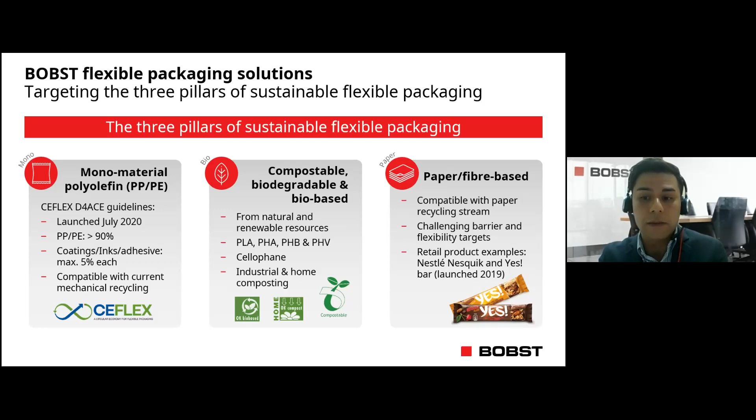This brings me nicely to a point on what are the mega trends for barrier targets. There are many depending on the different food segments, but we find for high barrier application, there are two targets. The first high barrier target is metallized polyester replacement at less than 1 cc per meter squared per day for oxygen, less than 1 gram per meter squared per day for water. The second is ultra high barrier target, also considered as aluminum foil replacement, which operates at 0.1 cc per meter squared per day and 0.1 gram per meter squared per day.

Let's take a look at the solutions BOBST and their partners in collaboration have got on with regards to these two mega trends.

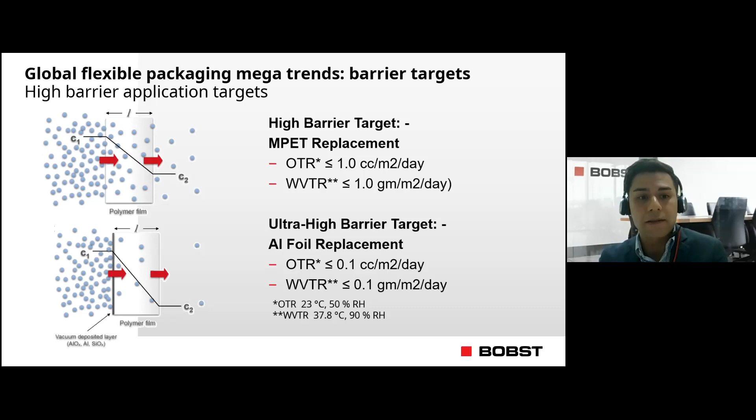Here we are presented with the dilemma visually of the mixed material structure, PET to PE laminate on the left, and on the right, the intermediate step of developing monomaterial PE. On the left, PET is coated with aluminium oxide, or ALOX, a brittle ceramic transparent layer, processed on a vacuum metallizer. A barrier top coat is carefully applied on a coating machine to protect the barrier layer. Ink is reverse printed, typically with either CI Flexo or Gravure printing machines, and the PE sealant typically undergoes dry lamination, where the adhesive is either solvent or water-based.

Even though PET is chemically a fantastic material, offering exceptional barrier properties against oxygen, and on its own as PET bottles and jars is actually a preferred material for recycling due to its lower carbon footprint compared with glass or aluminium, in a flexible packaging structure it does not lend itself to mechanical recycling due to its need to be sealed with LDPE. PET, generally speaking, as a sealing layer has poor sealing performance characteristics, although there is ongoing research on PET to improve sealability, but it is not widely commercial today.

On the right is a partially compliant monomaterial PE duplex structure, which is a like-for-like replacement for the structure on the left. The reason why MDO-PE was considered instead of PET was firstly to mimic the mechanical properties of PET. The machine direction orientation process improves tensile strength, stiffness, and optical properties.

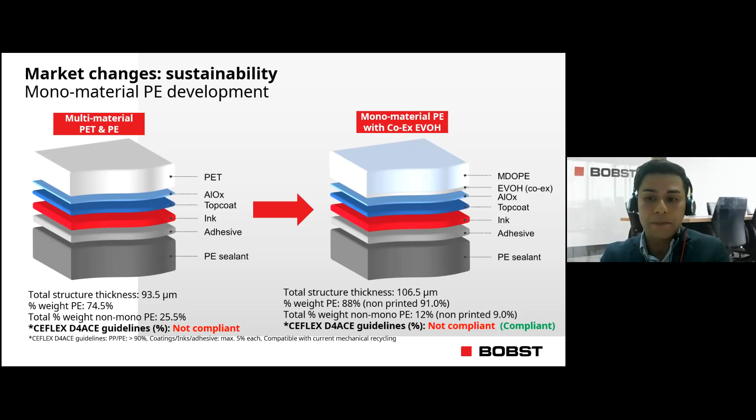I'm pleased to introduce the One Barrier high barrier solution from BOBST, which is the next stage of monomaterial PE structure development. The aim of BOBST One Barrier is to incorporate our know-how in wet dispersion coating of a primer with MDO-PE to obtain an EVOH-free scenario.

BOBST underwent 3 phases of development: a study phase of various commercially available primer chemistries, a lab phase testing the 5 best primers, checking for wettability and barrier levels, and a third industrial trial phase where 29 trials were conducted with 16 reels produced.

The structure to the left is a transparent solution with Alox, and to the right is an opaque solution with BOBST' patented Alibond high adhesion, higher barrier metallizing technology. Both structures follow the same steps of conversion.

BOBST' role begins following the MDOPE production. Then the oneBARRIER primer is applied through the BOBST Vision D850 coating laminating machine. Alox or AluBond is then coated on an Expert K5 vacuum metallizer and laminated on our Nova SX550 with a solventless adhesive, as this would have low thermal impact to PE. The film is then surface printed.

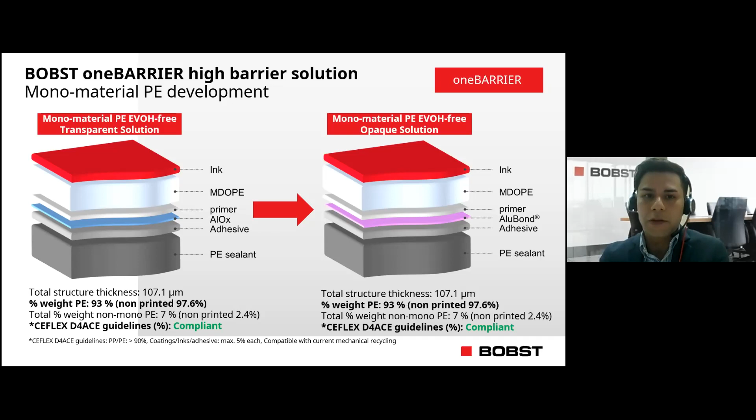BOBST partnered with Dow for their extensive know-how and resources on PE resins and Hosokawa Alpine for their expertise on blown MDO lines. The MDOPE was a 5-layer collapsed structure. As you can see, the barrier performance shown is within the normal range for blown PE, but there has been improvements, of course, for priming, for metallization, and so on and so forth. BOBST has tried 3, 5, 7 layers, and in Southeast Asia, the trend is moving towards 5 and 7 layers plus MDO capability. The oneBARRIER primer provides exceptional oxygen barrier properties.

When we combine this with our Alox Generation 2 process, we further improve the oxygen and water barrier level. And when viewing the complete laminate with a selected barrier adhesive, we are able to provide a solution that enters the domain of metallized polyester film replacement with a laminate bond strength that passes the market requirement of 2 to 3 newtons per 15 millimeters.

We were able to achieve similar barrier results with AluBond as well. This was an important result for us and our partners, as in the last 4 years, we have had a number of collaborations with brand owners, since they are not able to find these solutions readily available in the market. We firmly believe One Barrier will become an important reference in the market for monomaterial packaging, as it ticks all the boxes in terms of high barrier performing sustainable packaging in an economical way.

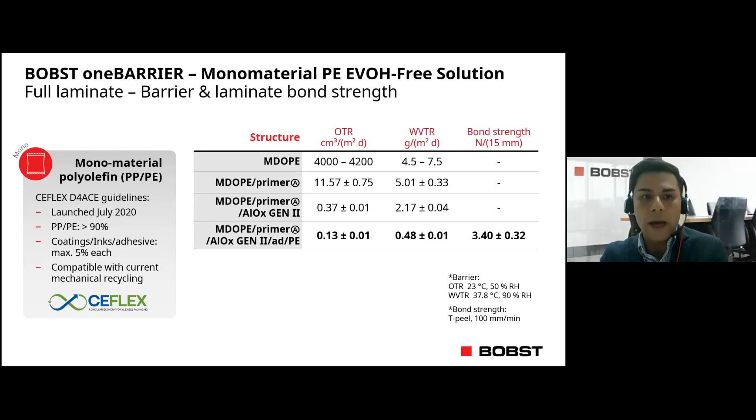BOBST has mentioned as one of its 3 pillars is to identify barrier paper solutions that is compatible with paper recycling streams. We collaborated with AR Metallizing for pre and post metallization lacquers and paper, and Michelman for their pre and post metallization barrier and heat seal lacquers.

BOBST provided our process know-how for metallizing with AluBond hybrid coating technology with the vacuum metallizer. This is a mono web structure and provides the foundations for a number of newly available barrier paper products in the market. As you can see, there's one example from Nestle with the Yes Bar, which was launched in 2019.

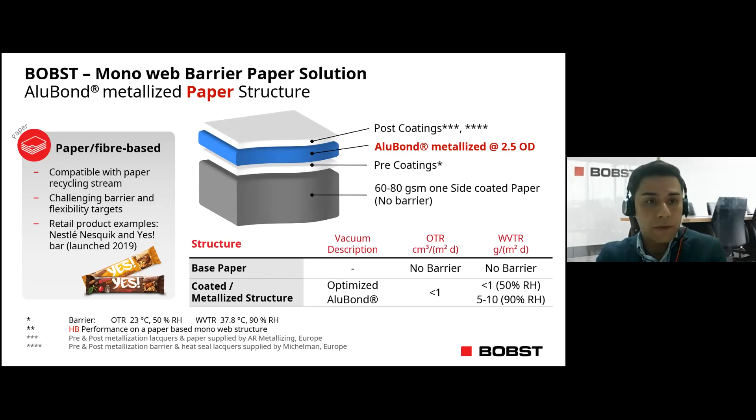As you can see, the base paper exhibited initially no barrier properties, but once coated and metallized, we were able to achieve the target of metallized polyester replacement. And this was an important milestone, which was first achieved back in 2019.

The BOBST One Barrier solution incorporates the hardware, process know-how, and collaborative efforts with like-minded partners who are aiming, like BOBST, for a circular economy with sustainable packaging.

Excuse me, Lucas. Lucas, you have 3 more minutes. Thank you very much, Mr. Chan. We'll be done soon. Thank you.

The BOBST K5 metallizer is really designed with sustainability in mind and is the go-to for most heat-sensitive products such as PE. BOBST strongly believes in an integrated package solution where quality can be assured by a dedicated partner in conversion.

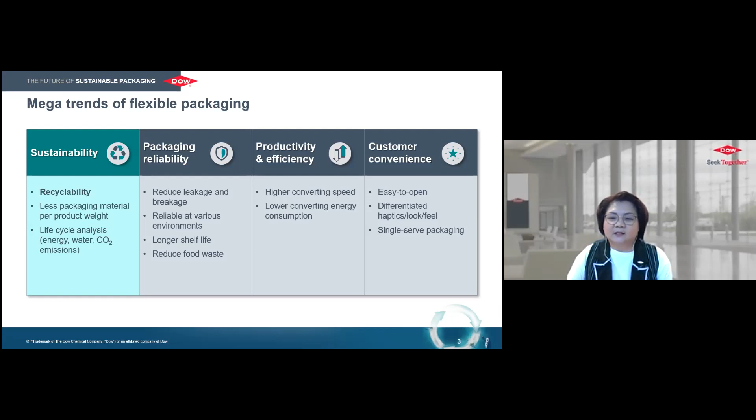So what are the key mega trends for flexible packaging? Listed here are converters' and consumers' expectations. Today, consumers are better informed, and sustainable solutions like recyclable packages and less carbon dioxide emissions are in scope. We also cannot ignore the need for reliability of flexible packaging, as it can improve shelf life as well as reduce food wastage. From the converter side, their wish list is always to increase productivity while lowering energy use. Last but not least is customer convenience, so as to meet their expectations.

So tenter frame polyethylene is relatively new to the market. Let me elaborate a little bit more about the technology. It's actually made with a tenter frame biaxial oriented process, similar to a BOPP line.

In the process, polyethylene is first extruded from a cast flat die. Then it is stretched in the machine direction by about 4 to 5 times, followed by about 8 to 9 times stretching in the transverse direction. Conventional PE resins are difficult to stretch under these conditions due to a narrow stretching window.

Dow has developed and launched a new resin called Innate TF80, which has superior processability on industrial scale tenter frame lines. After the high level orientation, PE films get outstanding physical properties and narrow gauge variation, which is ideal for printing

substrate or toughness enhancer layer for all-PE structures. The right top chart shows that TFBOPE demonstrates a good balance of stiffness and toughness, while able to provide clarity that brand owners and consumers love.

BOPP can also provide high clarity, but due to the incompatibility of PP and PE recycle streams, it does not score well on the recyclability part, but it's still better than BOPET or BOPA.

So the first packaging format we are going to look at is the polyethylene stand-up pouch. Here is a case of TFBOPE-based stand-up pouch development. TFBOPE replaces BOPA, providing functionalities such as printing web, toughness enhancement, and etc.

TFBOPE laminated solution demonstrates outstanding performance such as pinhole resistance, impact and puncture resistance, making it fit well for dry products and liquid SUPs. One key thing to note is that the barrier performance will not be as good as those using BOPA or BOPET due to the reduction in oxygen barrier performance.

Dow thus offers a unique solution to improve moisture barrier via the use of Elite AT 6900 enhanced polyethylene resin. So do reach out to us for more information.

Although applications with oxygen barrier performance is not ideal, applications which do not require high barrier performance can still be used, such as dry laundry detergent, pet food, rice packaging, and also dry food items.

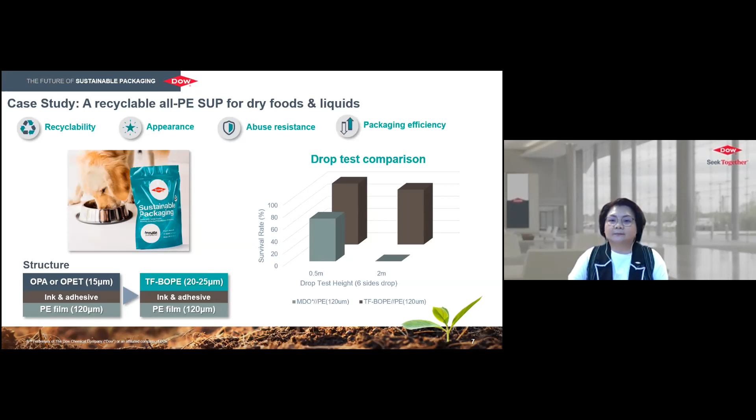In the previous sharing, the lack of barrier performance limits the use of all-PE SUPs. What if I have a need for improved barrier performance, in particular oxygen or moisture barrier? Thus, let's look at Dow's solution towards the recyclable barrier stand-up pouch.

We all know that polyethylene film has fairly good moisture barrier, but not for oxygen barrier. In this slide, it demonstrates an option of using TFBOPE as print substrate and laminating it with co-extruded EVOH PE coupled with Retain.

Retain is a polymer modifier that enables the recycling of barrier polymers like polyamide and EVOH, which was once impossible. Now, this recyclable barrier SUP is able to meet the required barrier performance and is applicable to dry food, snack food, and facial masks type of packaging while remaining recyclable.

The right chart shows the comparison between BOPA laminated to a PE lamination film against Dow's recyclable barrier SUP film solution. Dow's unique solution allows excellent oxygen barrier while maintaining pouch stiffness and toughness.

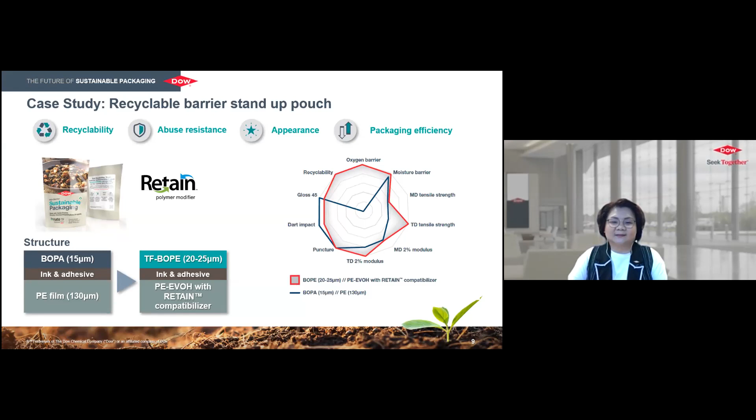In the next slide, let us talk about Retain and how it works. Retain was designed as a compatibilizer of polyamide and or EVOH with PE. Without compatibilizer, polyamide or EVOH does not disperse into PE, hence forming big opaque particles.

So Retain functions by reacting and forming tiny droplets in the PE matrix as shown in the picture on the right.

The left chart shows the film performance comparison of EVOH PE as recycled stream added into a middle layer of PE film with and without Retain resins. After adding Retain, optical and mechanical properties were significantly improved, even comparable to PE with 100% virgin resins.

This result clearly demonstrates the value of Retain, coupled with Dow's portfolio of high pressure copolymers as well as linear low density polyethylene. Dow will definitely have the right solution to meet your end users' needs. Thus, do connect with us to find out more.

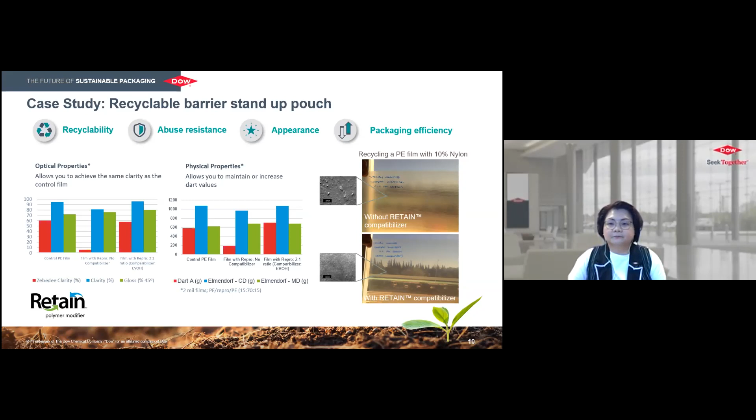The next packaging format we are going to look at is the all-PE thermoforming films.

A typical incumbent thermoforming films solution for packaging applications uses polyamide for thermoformability, which is related to stiffness and toughness, with the added advantage of shape retention after forming. And with polyamide, the draw depth can also be deeper during the thermoforming process.

However, polyamide may not be the best material choice when it comes to recyclability of such articles. Although Dow has Retain polymer modifier to recycle such articles, the most straightforward way is to design monomaterial structures for easy collection and recycling.

Thus, we hereby introduce Dow's solution for all-PE thermoforming films, as seen on the bottom left. This solution allows one to achieve a draw depth of 5 centimeters while maintaining excellent formability and balance of toughness and shape retention. The image on the right demonstrates the edge and shape stability after thermoforming, resulting in excellent appearance to the end users.

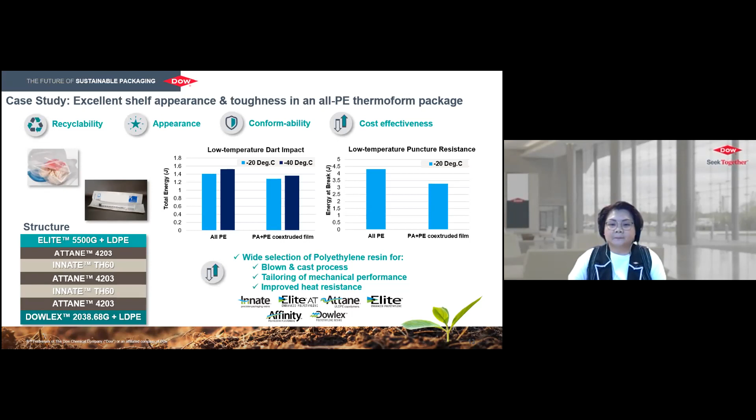So the next packaging format we are going to look at is the all-PE pillow pouch.

A typical pillow pouch uses BOPP, BOPA or PET as print substrate, laminated to a PE lamination film. Here we use TF BOPE to replace BOPA and laminate it to an 80 micron PE lamination film for vertical form fill seal pouches, to enable the concept of recyclable pillow pouches.

The right chart shows the TF BOPE laminates can deliver similar toughness, shelf appearance, and packaging efficiency. The only performance vector lower than BOPA-based laminates is the ultimate tensile stress in the machine direction.

This will not significantly impact the performance of the pouch, and in fact, the tensile strain of TF BOPE-based laminates is much lower than BOPA laminates, which helps prevent undesirable elongation issues that may result in delamination and other related problems. Such structure is applicable to detergent powder, frozen food, and dry food packaging.

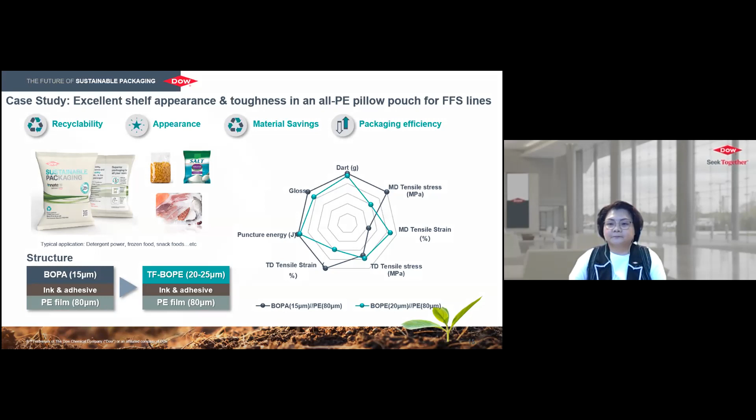So the last packaging format we will cover is a very new innovation from Dow, Lap Seal Stick Pack, targeting material savings and a performance approach.

Lap Seal Stick Pack, when compared to traditional sachets or fin seal articles, demonstrates a unique proposition in which typically we can save material in the range of 10% to fabricate a small package with the same amount of content.

With the use of TF BOPE, recyclable Lap Seal Stick Pack is now a reality. By using TF BOPE as a print replacement substrate to replace BOPET in traditional structures, there is no significant difference in terms of tear resistance, as well as stiffness.

The TF BOPE-based Lap Seal stick pack can easily survive the fish tank evaluation, which checks for leaks and packaging integrity, with the added advantage of productivity, where production evaluation allows production of up to 50 packs per minute per lane.

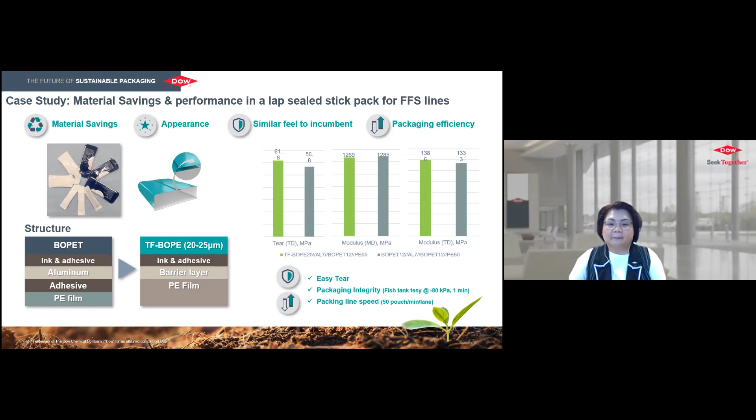From the evaluation, it is expected that sealant-to-sealant seal strength will be good, and with Dow's unique solution in polyethylene resins used in the sealant layer, we can achieve a good heat seal initiation temperature.

Dow's unique offering in polyethylene resins, as well as high pressure copolymer products, can assist you to migrate from traditional structures for lap seal stick pack to recyclable solutions.

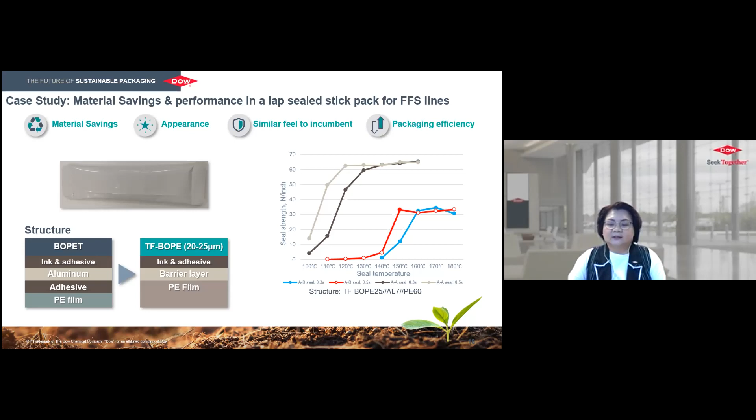Dow has spent enormous resources to develop packages that are designed for recyclability. This is the first step and the most critical step to achieve a circular economy. Dow, as a responsible polyethylene resin producer, wants to use innovation to divert plastic waste from the environment and hopes to work with all in the value chain to create a sustainable future with flexible packaging.

Together we can close the loop and seek the solution together to achieve better outcomes for Mother Nature. Thank you, and I hope you enjoyed the presentation. Again, I wish to express my thank you to MPMA for inviting Dow to present in this virtual conference, and it's a very wonderful experience. Thank you.

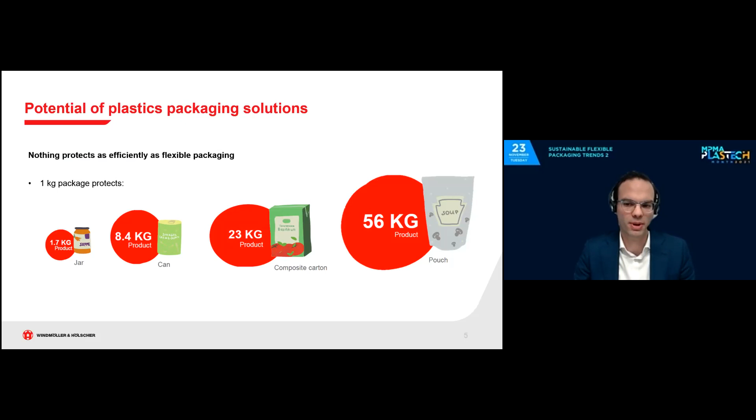If we look at growth and urbanization, this leads to new challenges as well. Transport volumes and distances have been rising for years.

Knowing this fact as experienced specialists, there are many studies showing how much more CO2 would be raised if you need 33 times more trucks to bring the same amount of soup to supermarkets using glass. In addition, you need up to 26 times the trucks to bring empty glasses to the filler. So I think the responsibility of the whole industry is to combine the potential of plastic packaging with the recycling goals of the OEMs.

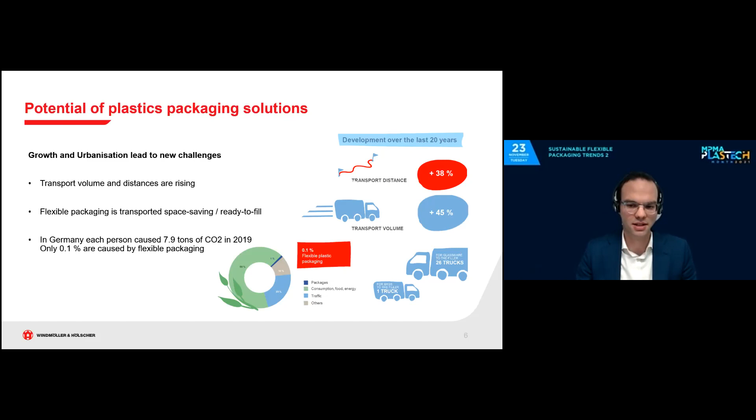One case study of how to do this is our stand-up pouch, which we developed for K 2019 initially, but have improved many times since then and added functionalities.

We've heard already today that PET and PE are too different from each other to be recyclable together—for example, melt temperatures do not fit. However, in order to find a PET replacement film based on PE, we have to have a close look at the end application and the process steps to produce such a pouch.

These steps are extrusion and printing, two fields of expertise where W&H feels very comfortable, supplying the machines. But lamination, pouch making, converting, and handling of the packed goods are also very important. Here we have partners in our team to make this not just a film, but a full product.

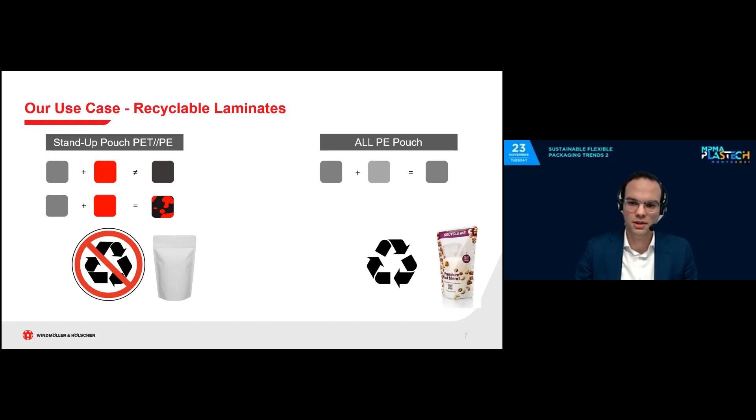The pouch you see in this picture is a collaboration of W&H and these partners, and it is completely polyethylene based. It consists of two films: a 25 micrometer stretched MDO PE film and a 110 micrometer sealing film.

MDO, as we've heard today, stands for machine direction orientation. That means we stretch the film heavily, 5 to 6 times, in the machine direction, altering the film properties in the process. The MDO PE film, the 25 micrometer film, is the one that replaces PET in this pouch laminate, and this is the one we spent so much time and effort developing.

So why do we stretch it? It needs to be very clear, because this film needs to be back-printed. It also needs to be heat resistant because it's the outer layer and gets in contact with the sealing bars. The film needs to be extraordinarily stiff and flat to be printed at high speeds on flexo or rotogravure printing presses. The stiffness is needed to make sure it's a stand-up pouch that stands and protects the goods inside.

Our goal was to develop a film that runs on existing downstream equipment, and the experience we gathered during this project was that, so far, it works. Both films that make up the pouch were extruded on the same Varex II blown film extrusion equipment we have in our lab. The 110 micrometer film is a 5-layer sealing film—it could also be 3-layer—and is a standard blown film without any orientation. As mentioned, the stretched MDO PE film needs all these enhanced properties: clarity, stiffness, heat resistance.

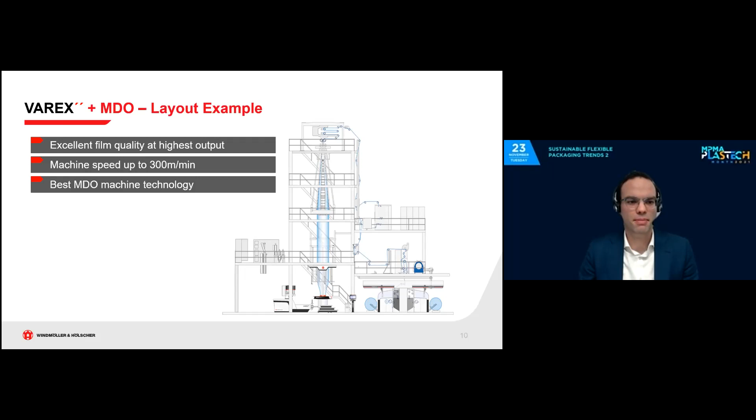Great efficiency usually means high output on such a blown film line. We achieved this with our Varex II lines by adding different leading technologies—for example, machine speed up to 300 meters per minute, meaning the machine speed will never limit the output. And of course, to make this product work, we tried to bring in the best available MDO machine technology in the market.

If we look at the basic layout, what is very important for this process, in difference to standard blown film extrusion—standard still has an air ring, a gauge control system, one profile measurement system, then we go to the haul-off, and there we have an MDO stretching unit, and a secondary thickness measurement after the MDO. Why this is so important, I'll explain in detail a little later.

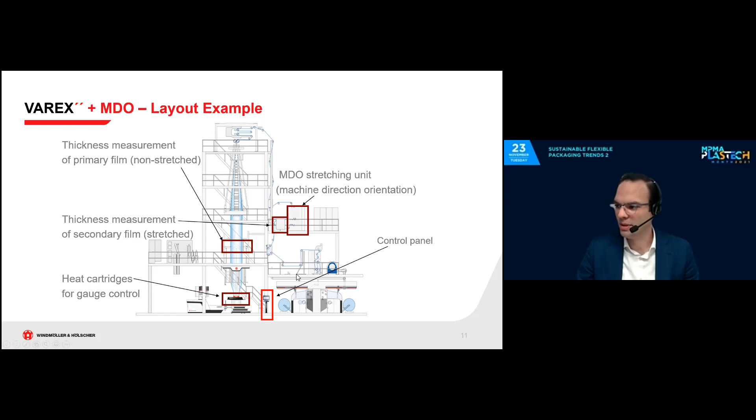Our MDO-M, as we call it, is very modular and tailor-made to your needs. It can have 8 or 10 rollers, plus 2 additional preheating rollers available, so in the end we look at up to 12 rollers. Each roller is temperature controlled up to 160 degrees to make sure that even high density material can be nicely heated up and stretched. The stretching gap itself is adjustable to the product needs.

Of course, these Varex 2 lines are not only for MDO products. It's possible to bypass the MDO and just produce the sealing film or any other standard blown film on this type of machine. And we have our patented OPTIFIL P MDO automation for two reasons: one is to massively reduce the trim, and secondly, to give you the best planarity of MDO film in the market.

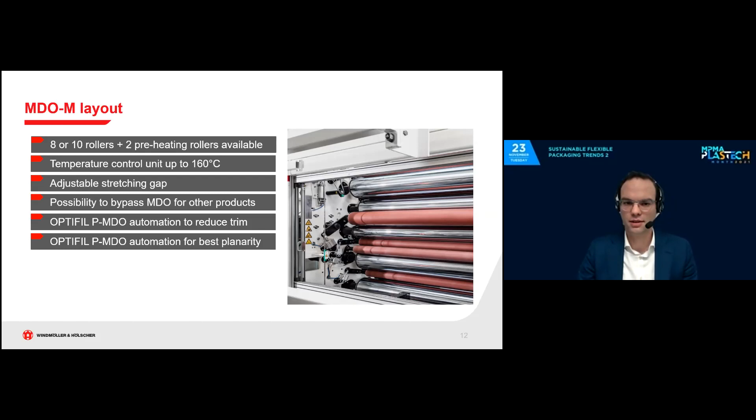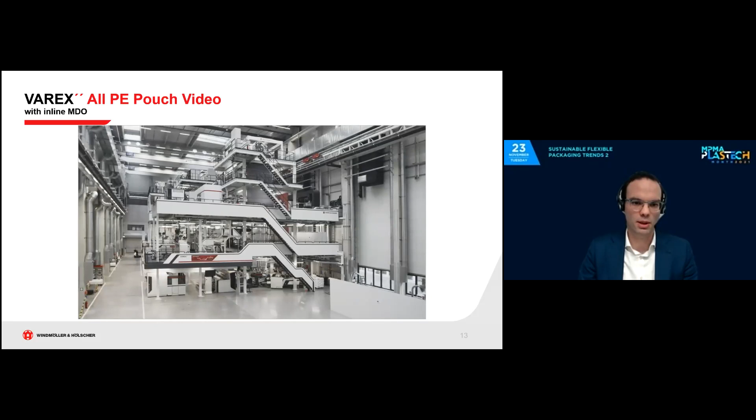I would like to show you a small video from our lab to give you a better, more moving imagination of how the MDO can look like. This is our lab, and we will follow the material through the extruders shortly.

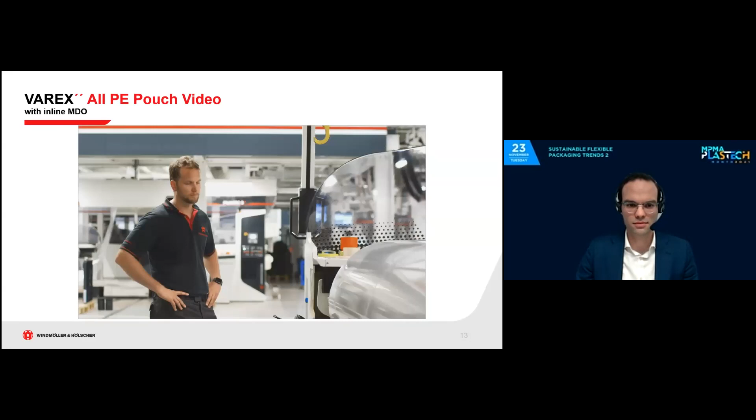In the video you have seen the OPTIFIL P-MDO automation and how it works, and I would like to present this system in more detail. It ensures that you produce perfect film while minimizing the amount of process waste during production.

Let's take a look at the stretching process from a film's perspective. At first you come in with a nice and flat profile - this is how you normally extrude. And when you stretch this film, it gets thinner and narrower at the same time, just like a rubber band that you would stretch.

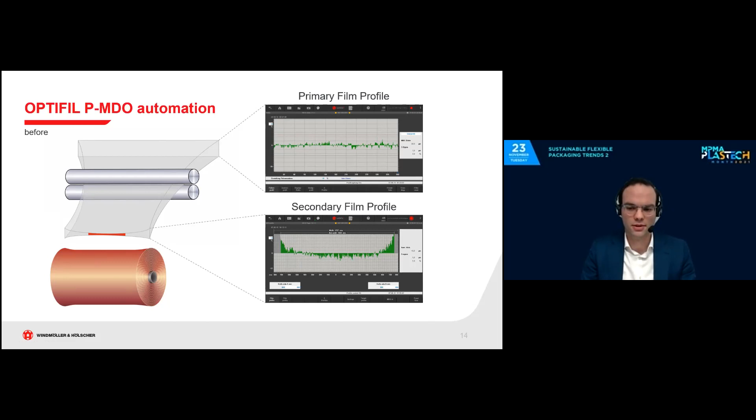And of course, we have a reversing haul off. That means the two thin spots need to travel with the reversing of the haul off. So the film entering the MDO unit is not a perfectly flat film like in the slide before - it's a warped film with thin edges. The stretching process smooths out the film so that you achieve a great profile with much smaller amounts of film that you have to cut away.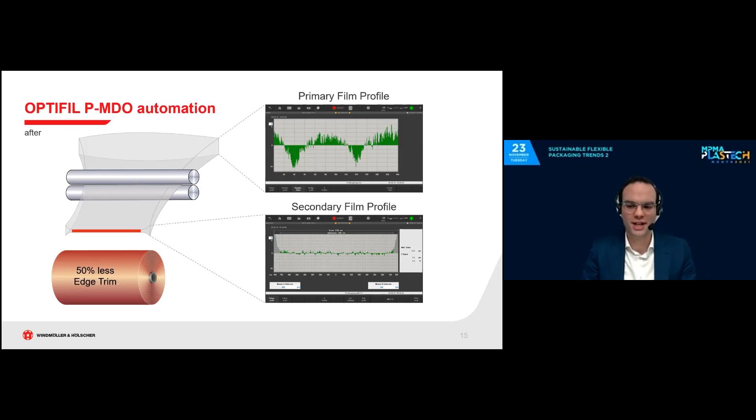The edge buildup cannot be eliminated completely - this is physics - but you can reduce the amount that needs to be cut away by about 50%. The know-how around PMDO automation grows more and more with every machine we have in the field and every customer trial we run in the lab. The technology has been around for more than 8 years, and we are continually improving the algorithm behind it.

And of course, to close the loop, as mentioned before, this edge trim, which is unavoidable, can be reground and then used in the sealing film. Then the stand-up pouch is fully made of monomaterial, and we can recycle it again and use this regranulate as post-consumer recycled material for products like shopping bags, waste bags, or collation shrink film, which we have done so far.

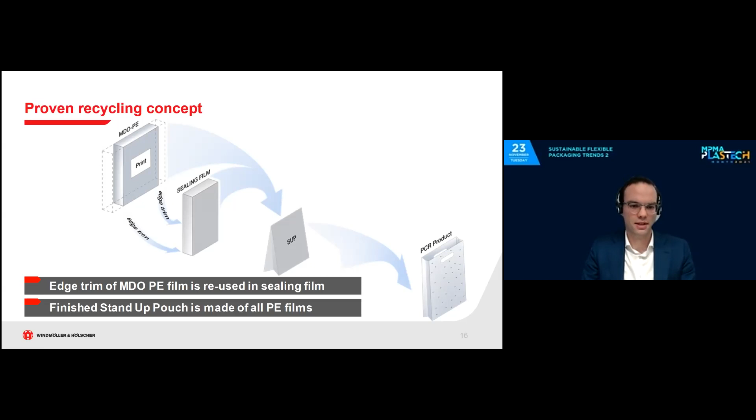As presented to you before, we developed and fully tested this PE MDO film for the K-Show 2019. After that, we sent approximately 250 sample reels of this film to converters across the world, and we received very positive feedback on the performance of this film.

Due to COVID-19, testing in our facilities in Lengerich is a little bit challenging at the moment, but still we are doing remote trials and tests together with many customers in our lab, and we are happy to invite anybody of you who is interested in testing such films, maybe with your own resins or recipes, to Lengerich to have such a trial.

Till now, we have performed together with our customers more than 1,500 hours of trial time on our MDO lines in this lab. This is about 60% of the total available MDO testing capacity in our lab. Some of you may have been present in one of these test sessions and have accompanied this test.

What have we tested in addition to the stand-up pouch use case we showed you? We have tested stretching barrier raw materials like polyamide nylon and EVOH, used different sealing and heat resistant layers, and produced films in blocked and non-blocked structure, 1-up and 2-up, seeing challenges and solutions for both methods. We are also experienced in adding co-extruded barrier materials like EVOH to get OTR and WTR values, different sealing and heat-resistant materials in these blocked and unblocked structures, and using recycled materials. We have even gathered experience in barrier coatings on an inorganic basis.

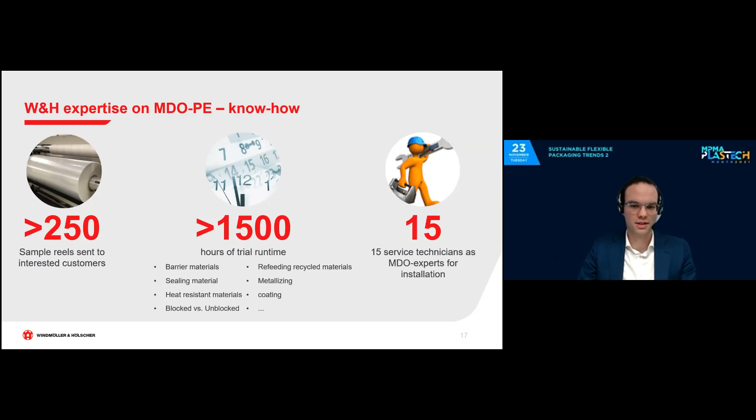If we look at the number and positions of MDO units, we have more than 100 units installed all over the world, evenly spread across the whole world, and the numbers are rising because it is the big mega trend, as mentioned before.

What are the next steps and big trends we see after this development? We have heard a lot from Bobst about the typical demands of oxygen barrier and water vapor barrier. In our different testings, we have reached OTR values below 1 with EVOH co-extruded film with very low EVOH content inside, because if you add 10 micrometers of EVOH in such a film and stretch it 5 times, 2 micrometers are still in the stretched film, and this is very much compliant with the CEFLEX guidelines.

So these are the next steps: bring oxygen barrier products into the supermarket. The basis is there, we have done many tests, and the products will shortly arrive, I guess, in supermarkets all around the world.

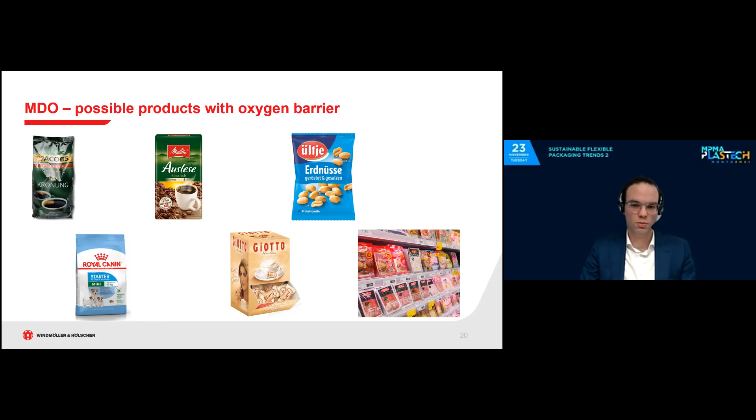A short summary: sustainability is changing the packaging market, with new demands and new solutions. New solutions need new technologies, especially in the extrusion area, but maybe as well across the whole process chain, all companies need to be ready to adopt technologies. The installed base of extrusion machinery will either need to be replaced or retrofitted with MDO units to fulfill the OEM goals of fully recyclable film by 2025. And there are many products out there that still need oxygen barrier, meaning either co-extruded EVOH or added coatings are necessary.

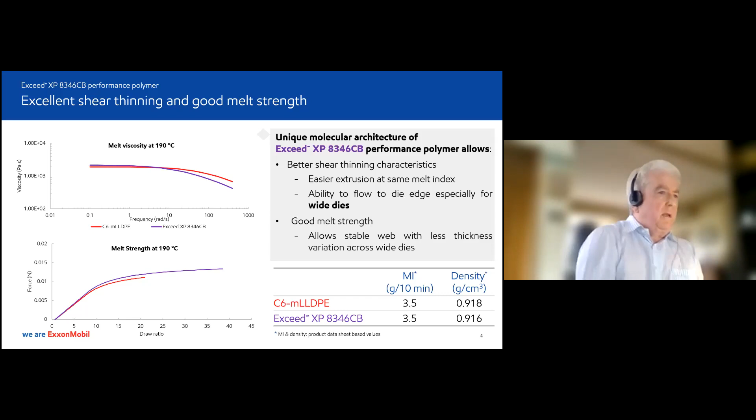So what that means is that, from a sustainability point of view, we can look at potential energy savings here. And as you're about to see, we're able to introduce some interesting properties too, which would mean that customers can even consider some down gauging.

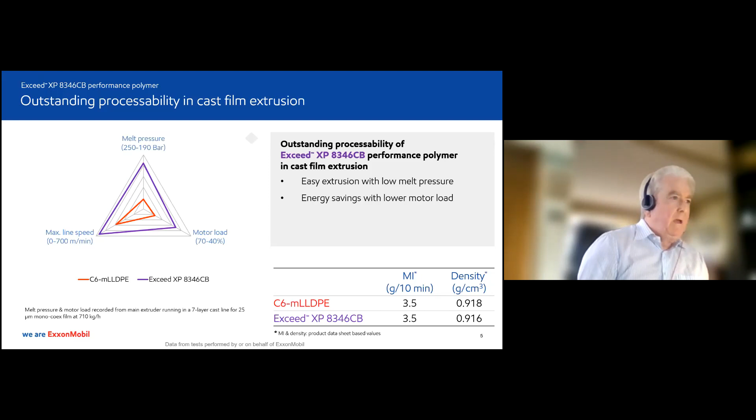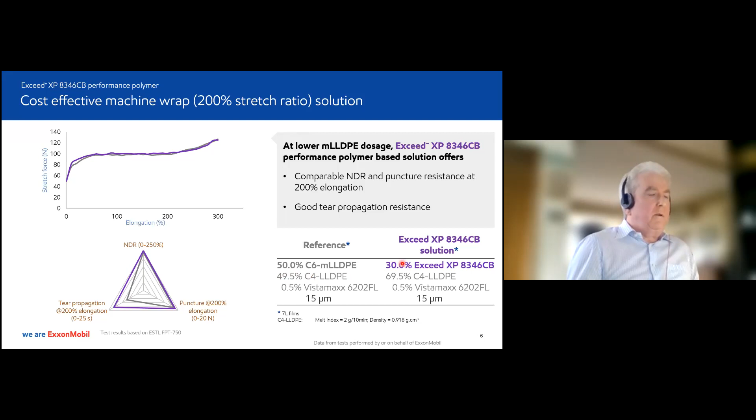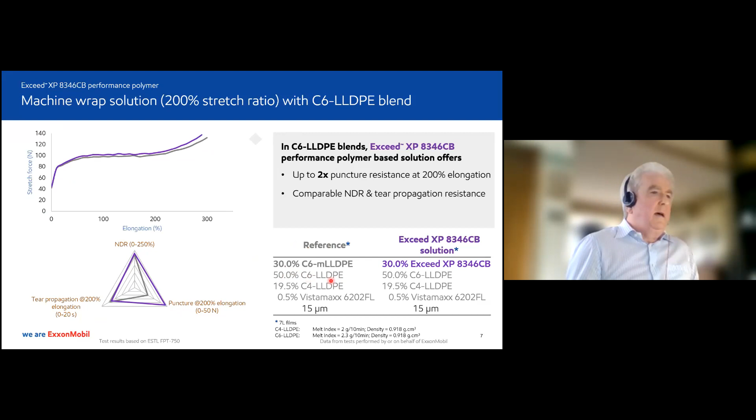Now we can take that one step further and say, what happens if we incorporated some Ziegler-Natta C6 into the structure? As you can see, in both cases we've got 50% in there, and we've still got the 30% Exceed XP8346. Now we've got a significant boost in puncture resistance. So again, when you have very big improvements in puncture, it raises the issue: do we really have to make a 15 micron film for this? Can we get even lower in gauge? This is what we're trying to educate our customers on—the relationship between the use of performance resins and down-gauging.

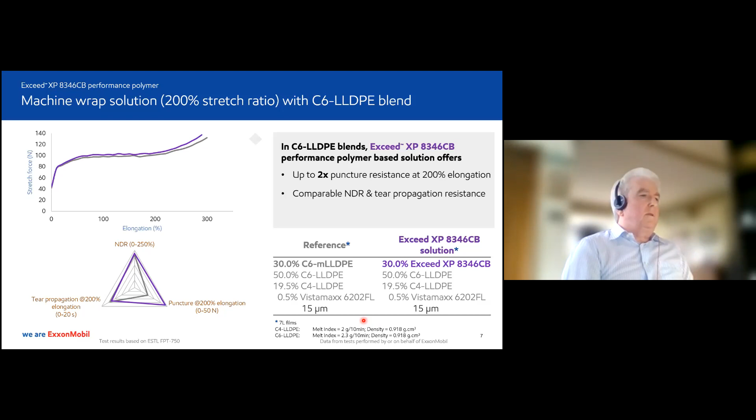Now another very interesting property of this grade is that you can use it in a non-cling layer, and what we've found is it actually promotes cling in the opposite layer. At the same time, the unwinding force is lower. You can see those examples here, where we're using C4LL as the resin in the non-cling layer. The reason I've used C4LL as a reference is because we are typically targeting hand wraps and machine wraps, which would tend to use those sort of grades, but obviously other grades could be used.

The other important significance of looking at C4 as the reference here is that in many cases, metallocene skins are difficult to cut on lines. So we found that using the Exceed XP8346 in the non-cling layer is actually not so bad on cutting—it's fairly forgiving. In combination with its easy processing, the fact that it promotes cling in the non-cling layer, reduces unwinding force, and has terrific puncture resistance, particularly when used as a discrete layer, means this is a very exciting new grade that cast stretch customers are now having a good look at. So far the feedback has been very promising, and we want to see how far we can go with this, but we think this is a really good grade and a bit of a game changer for this particular subsegment of the industry.

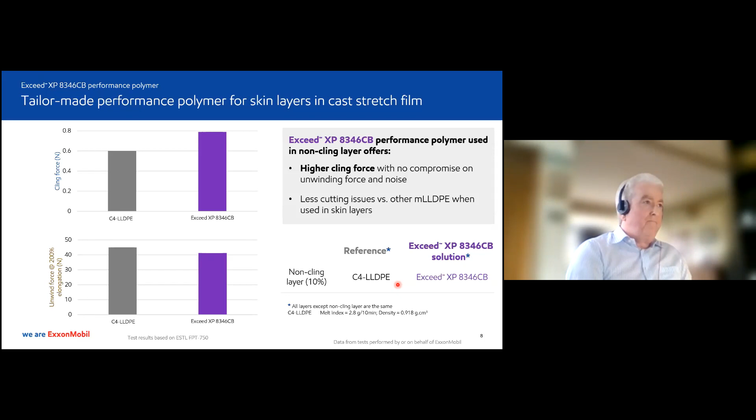So the first application I want to talk about here is stretch hoods. I think many people will be familiar with stretch hoods. They compete against stretch wrap and shrink hoods in the marketplace. So there is a home for all three at the moment.

For where the stretch hood is a home, the gauges can vary quite a lot, but most would be in the 100 to 120 micron range. As you can see from the formulations listed here in purple and pink, the purple one lists a single grade, Exceed XP 7052, which is the 0.5 melt index. So we could use this grade typically in all layers of a coex line if we wanted to, adding some anti-block and slip as necessary. But from a resin point of view, it's possible to actually run pure 7052.

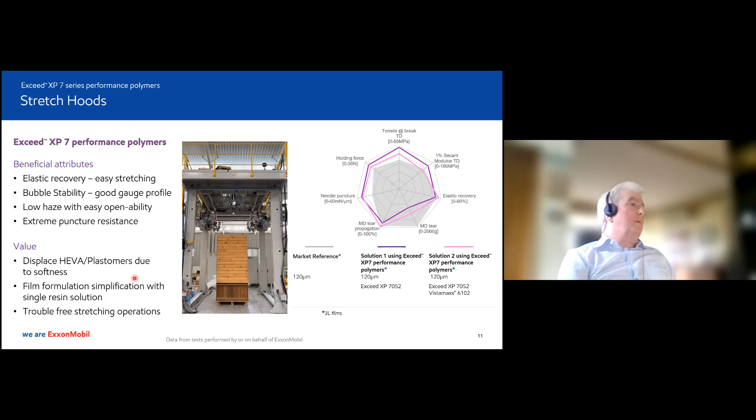So there's a nice simplified solution exploiting again the melt strength and the toughness of the resin, and the lower density, purchasing some more elastic recovery, which can be improved upon with a blend partner. The other good thing about it is the haze is also very good, and the nature of the resin is such that it has reasonably good openability as well. So customers, once they get to try it, actually warm to it fairly well. You can see that some of the value here would be to replace some of these EVAs that are in the core layers, and even in some cases some plastomers. So that's an example of stretch hoods.

Now I'll switch briefly over to some primary packaging, because some of you would have seen that low density and thought, that's a good grade I can use in some primary packaging applications. The particular property I want to raise here is the flex crack resistance. It really is outstanding. You can see along the x-axis here that the 7 series, these 2 grades here, have particularly low hole formation even after 10,000 cycles on the flex crack test, which is now approaching and perhaps even bettering some of the XP8 series, which is our other very good series for flex crack.

Because of its really good bubble stability as well, and its incredibly high puncture resistance, it now becomes a very interesting resin to use in thermoforming applications. For thicker films, this particular series of resin does offer very good optical properties. And as you can see from the bottom right-hand corner, the sealing performance is also excellent.

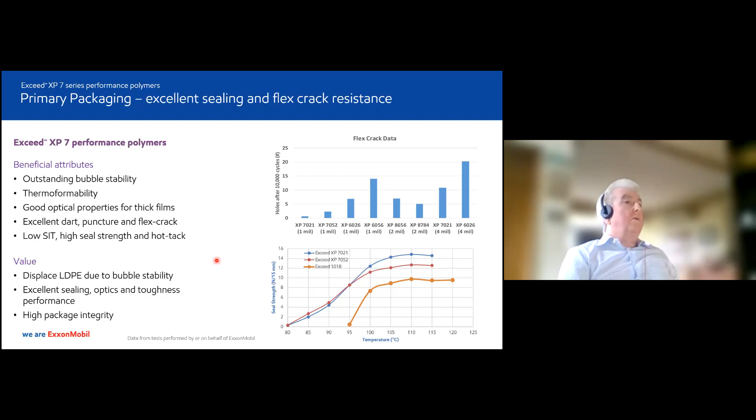You can see here our Exceed 1018 series, which has been a workhorse in the marketplace for us since 1995, in fact, and it's still going strong. But if you really need that lower SIT and an improvement even on the plateau seal strength, then these grades can offer that. So I think if you take into account now the overall improvements in sealing and toughness, it really starts to open up markets, say in liquid packaging and bag-in-box type applications.

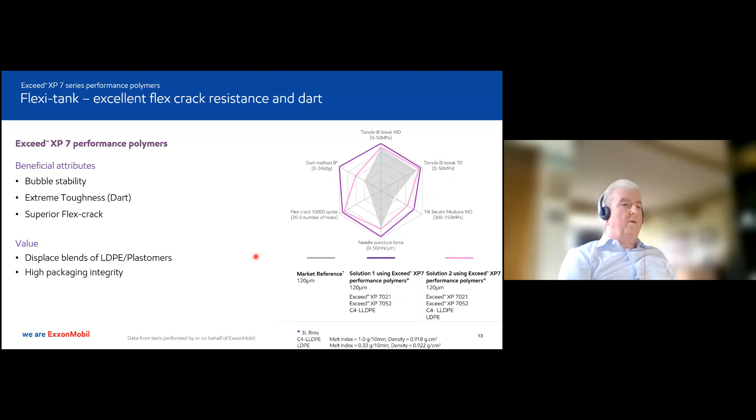Moving back to industrial packaging, low temperature shrink was something we brought to the marketplace recently, even in a webinar series, and the XP7 series plays a major role in this application. So what we're trying to do now is get the shrink tunnel temperature down really quite low, particularly when we're trying to pack heat sensitive products.

But notice that even with the addition of that medium density resin, we now have to drive the shrink tunnel temperature up to 130, which is still very low compared to what people normally run shrink tunnels at, but it's still not as low as the 120 you can achieve without the medium density inclusion.

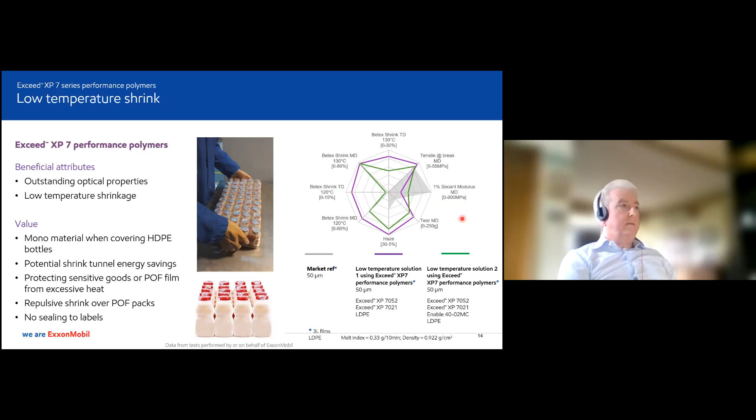The last example I wanted to talk about is inclusion bags. Inclusion bags are those sort of bags used to wrap rubber bales, for example. And when you process a rubber bale, the packaging actually goes into the processing unit, so it gets melted and dissolved into the bale. It's usually at the domain of things like HEVA resins and things like that. Well, now that we've got these resins that have particularly good puncture resistance and low Vicat softening points, you can see there's potential for these films, these resins, to go into this market.

I don't have any data on this at the moment. This is more, I would say, a potential market to look at, but it's definitely an interesting one. And I guess if you had to pick one of these two, you'd probably go for the 7052 first, because it tends to have the lower temperature attributes that you're looking for.

So that's really what I wanted to capture in the XP7 series. It's a very interesting set of resins that can be used in both industrial and primary applications - really exploiting the flex crack resistance benefits, the processability, the melt strength that can also be used in thermoforming applications, and of course low temperature shrink applications.

Okay, the last one we'll talk about is design for recyclability with Exxon polymers. We've already had some very good talks focused on recyclability, pushing the BOPE approach, and more data on the MDO approach. I'm not here to say which one's better, but it's clearly an angle customers are looking at, because we're trying to replace nylon OPP, OPA, PET, OPP, OPA type substrates, which are not recyclable, with a polyethylene type substrate.

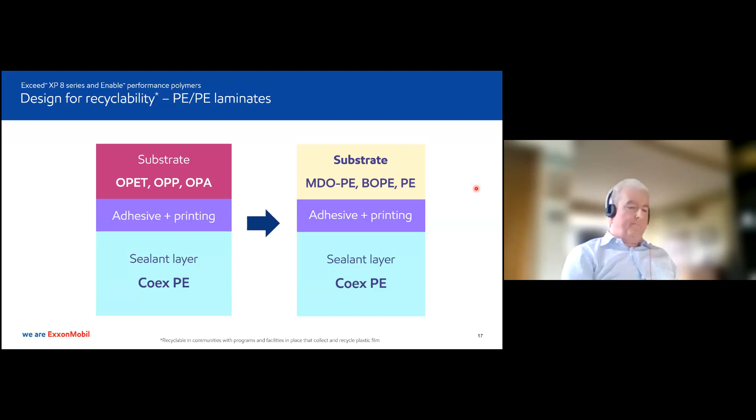We all know there are a lot of challenges with full PE laminates, well discussed by our previous talkers: suboptimal bond strengths, heat sensitivity on the side closest to the sealing bar, which is particularly difficult now with heat sealing bars, and sometimes spouts can be difficult to incorporate. Recyclable barrier solutions are always a problem too, so I'll talk a little about recycle and barrier in another slide.

So heat resistance and optics, how do you do that? MDO is very useful because you can afford to use a higher density polyethylene product when you've got MDO and not sacrifice your optics, while also getting good stiffness. You'll probably still need extra stiffness on some subskin layers, and you still need a degree of toughness, but toughness normally means bringing down the stiffness. The MDO compensates for that to a large degree.

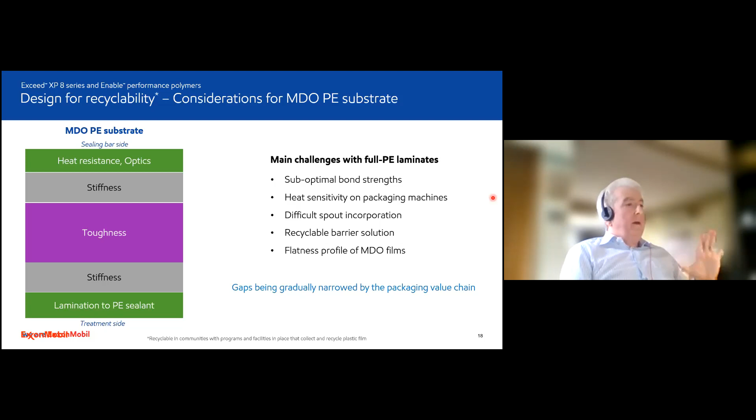This is a very oversimplified diagram. There will be different arrangements that people can use and blend, but these are the key aspects. Lastly, you need a side to laminate to the PE sealant. Notice in this example, I haven't included any barrier resin at all—this is just a straight polyethylene type.

I'll give an example of a 5-layer MDO substrate structure laminated to a 5-layer PE sealant, which I'll compare against a BOPA structure and a BOPET structure laminated to competitive sealant structures. The MDO here is about 25 microns, though it would start off thicker, probably around 125-150 microns. The nylon or BOPA is typically 15 microns, and polyester typically 12. So we're competing against known gauges in the marketplace.

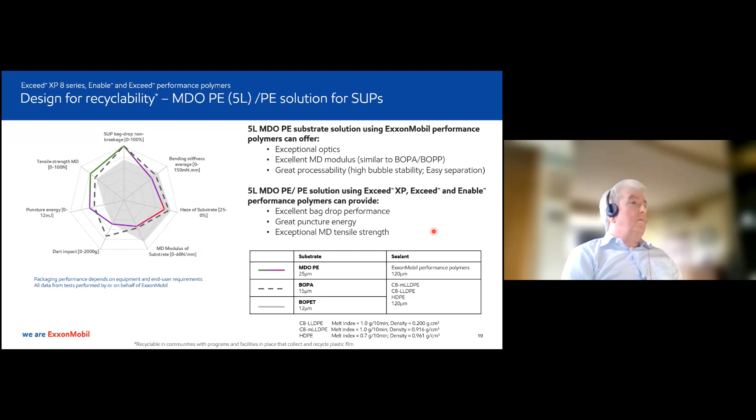Now, what I haven't covered is how we get the recycle in there, and how we get the barrier. I'm not going to focus too much on barrier today. We know customers are already using some barrier resins, and we find it's actually more used in the sealant resins rather than the substrate. There are different ways of achieving barrier, and a lot of work being done in that space, which I won't cover.

We can also add up to 30% recycle in the overall structure, not just in the sealant but overall, and still get a resin and a stand-up pouch that performs very well for its target market. In this case, we'd be looking at non-food applications because of the concern of the recycle, things like fabric conditioners and detergents.

So again, the use of recycle will be maximized by using performance resins to bolster the performance of those resins. And the move to 5-7+ layer lines on your extrusion line also means you're far better positioned to tailor the structures you want, to keep recycle away from some layers and maximize the performance of the metallocene and others.

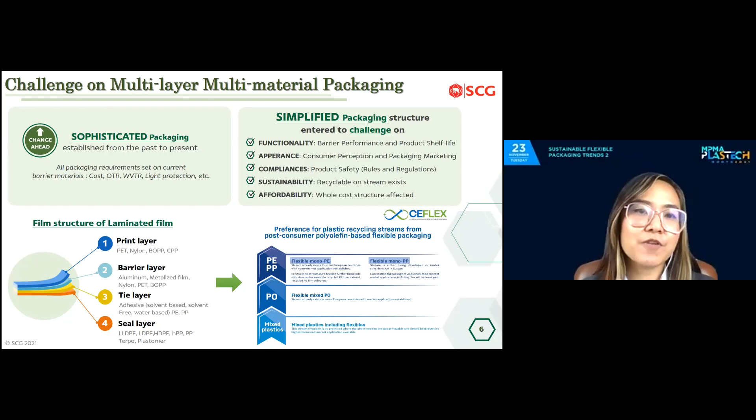For example, aluminum or metallized PET, PET for a barrier layer to extend shelf life of the product, and other examples like sealability, using a seal layer, for example LDPE terpolymer - this is just an example. So the question is, what is the challenge? The challenge is how can we combine these functions into one material that is more preferable for the plastic recycling stream.

And the second is Unilever. Unilever have launched full PP packaging with metallized OPP in 2020. And the last one is Nescafe, who have launched full PO with their 3-in-1 coffee sachet drink. And this is just an example. There is also a lot of development ongoing that is not included here.

The most important message here is let's get it started now. Every company is doing their best to achieve the recycling target, even though there is no concrete solution for the barrier material yet.

So back to our journey. What SCG have done to enable the circularity trend - we are proud to present SCG green solutions that can implement into 4R: reduce, recyclable, recycle, and renewable. But for today, I would like to focus only on the second R, that is recyclable.

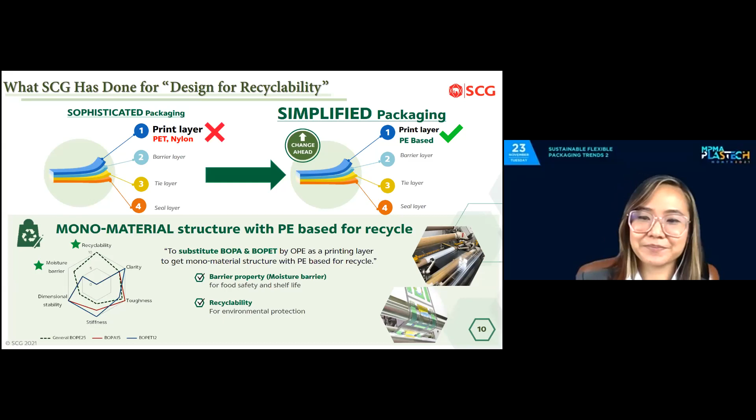Okay, for SCG, we have developed the high density polyethylene technology. It stands for Siam Multimodal Excellence, or SMX technology. With the uniqueness of the multimodal technology, the materials can be designed to balance the processing and the mechanical property in the same way.

So the next question is, what will happen if HDPE material from the SMX technology can be implemented and served for monomaterials packaging? In fact, at SCG, we are not the first one trying to use PE in monomaterials packaging. The general BOPE has been used commercially in the market for a few years.

However, because of their too low dimension stability, the laminator needs to reduce the production line and also the production rate, which tends to result in bad seal appearance, and it can lead to a narrow operating window of the packaging speed. So with this problem, this is why SCG BOPE developed from the SMX technology can solve this problem.

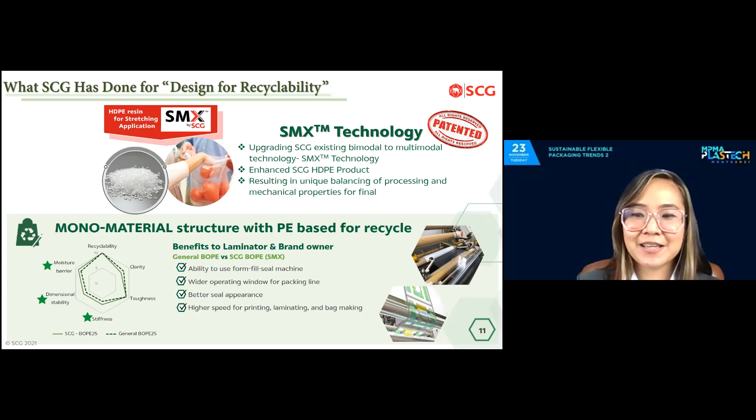So the next question is, how do SCG BOPE and MDO film perform? So let's see how it's different. To compare with the conventional printing layer, in this case I would like to compare with PET. And you can see here, SCG BOPE.

And not only for the recycling ability, but also the dart drop property - SCG BOPE can show 40% higher dart drop compared to the conventional printing layer and general BOPE and MDO solution. However, SCG BOPE cannot fulfill all properties of the PET, especially for film stiffness, as you can see in the secant modulus.

And the other benefit from SCG BOPE is the dimension stability. And you can see we can give the better dimension stability, or lower thermal shrinkage, compared to the general BOPE and MDO solution significantly.

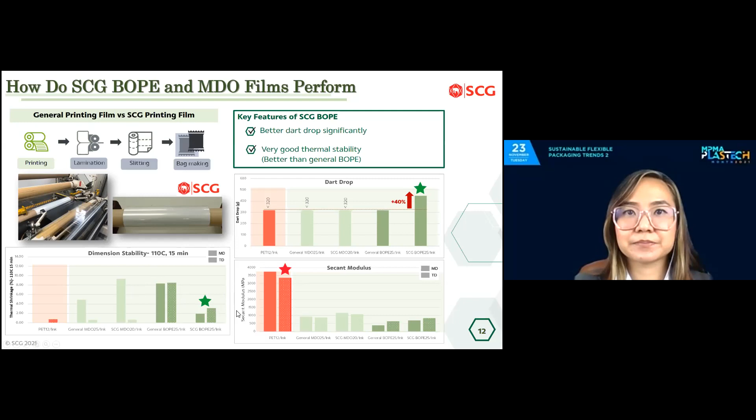So what about the performance on the lamination? Comparing the monomaterial full PE to the multi-material packaging containing PET, it's very clear that some properties could be better or equivalent, but some properties could not be the same. This can be solved by structure design to support the monomaterials packaging.

The SCG BOPE can provide high heat resistance and also lower thermal shrinkage. And also you can see here, we can give higher dart drop compared to the conventional PET printing layer, by 2 times. And as SCG BOPE is in the early stage of development, SCG is entering into this area actively.

And try to collaborate with global machine makers and also film converters, trying to develop BOPE into the market.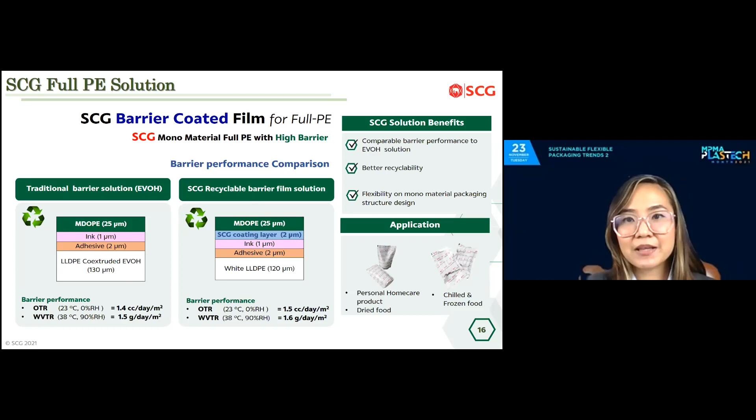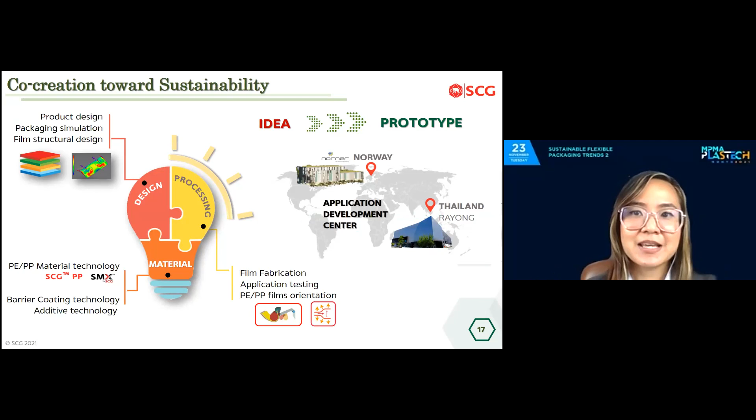From the whole story here, SCG could not go alone. SCG is also open to ideas from everyone and from customers to convert into the prototype together. We can provide you our capability on material design, processing technology and guideline, and also film fabrication with available application development centers in both Thailand and Norway.